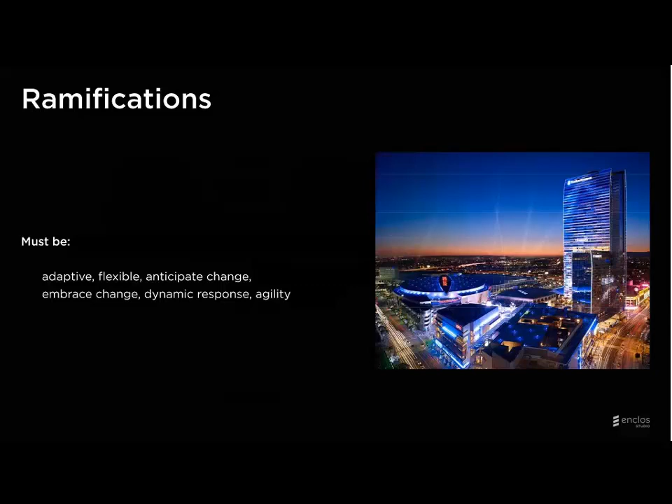And so really, when you have this model that isn't repeating what the systems are from one project to the next, what then does become required is a group of individuals that are adaptive and flexible, and it really becomes about agile minds and a willingness to evolve.

And really, when we talk about the tools that we do that with, we're here to talk about our parametric workflows, but really the backbone of that is not a software. It's really individuals who are willing to think logically, organize their process, map out their process, and then execute, and be willing to work together. And so things like authorship of design have to be shared, and a willingness to sort of pull out the best ideas from your peers.

So the actual tools that we use in our practice early on in the process, early phases, we'll use anything all the way down to Excel to manage data. We'll use other forms of database as well. For our iterative modeling, we don't only do Rhino with Grasshopper, but a lot of times that's what the architectural team is using at the time we get involved. So we try to use the same tools and interface in the same platforms, but bring in the constructability angle, not a design modification, but introduce constraints.

And then during estimating, we use Revit as well. And once we get a project and it becomes secure and real, we end up modeling everything out in greater detail in Revit, and then using Inventor to create each unit of our system automatically. And so we've developed some internal tools we call the e-generator, and it will take this information out of Revit and Inventor and automate the drawing of the part and the unit pieces.

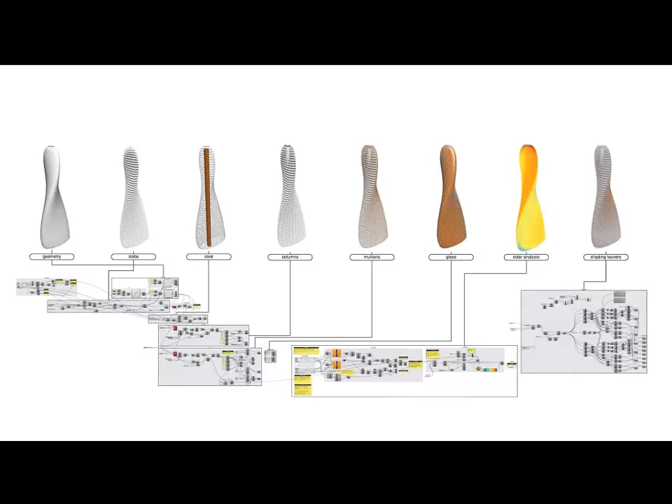And then here, maybe I can stitch together several different processes. So all of these steps are dependent on the initial form that we see at the far left. So if we twist that form twice as much as we see here, all the subsequent steps will update automatically. So by mapping out this logic, we're able to save time in developing iterations.

So the first project has been completed, but is kind of on delay to open up. And this is the Fulton Street Transit Center in New York City. And the part we're focusing on here is the sky reflector net. The project is located at the corner of Fulton Street and Broadway in Lower Manhattan, and sees around 275,000 daily passengers. It's right by Wall Street.

And so the project team was really developed by a collaboration between Grimshaw and Arup, and James Carpenter and his group really worked on the central piece that we're going to talk about.

So this is the initial preliminary renderings. The idea is to deliver daylight deep into the depths of a public space that doesn't otherwise normally get daylight. And the solution really ended up being a complex geometry. It's a doubly curved form. It has 952 unique panels.

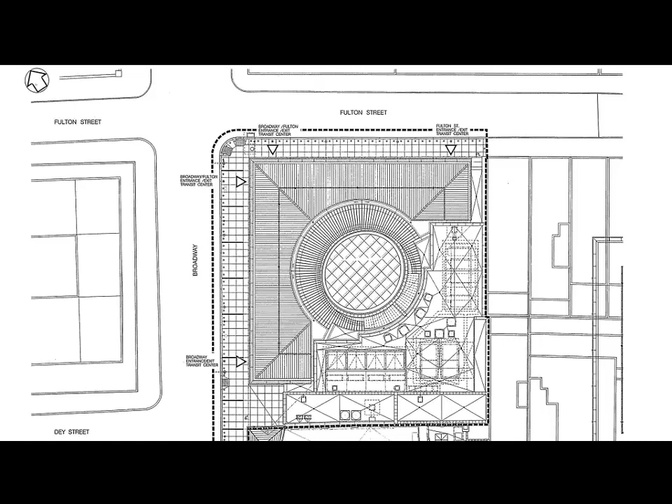And what drives the shape of this are these 1,000 plus nodes. And all this information has to be managed, and it has to respond to the different loads, but it all happens over small square footage, only about 8,500 square feet. And so there's a lot of data points, a lot of lengths, and all these are unique numbers.

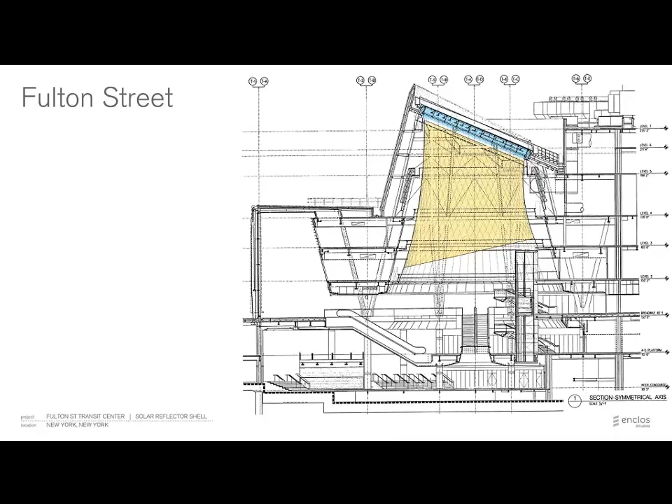So really we saw this as an opportunity to explore parametric tools for the first time in our office about 6 years ago. And this is just sort of peeling back the layers of the structure around it. There's a metal-clad dome that surrounds this doubly curved net that hangs from a skylight at the top. And all this is supported by a series of V-columns and primary structure. So the net hangs from the top, and daylight enters through that oculus at the top.

So this is sort of our interpretation of the initial renderings, and then a couple years ago under construction. So we see that this is a confined space. This exterior metal structure, the metal cladding, really kind of obstructs and limits our ability to construct this shape. So the whole idea was we had to develop not just a way to manage the complex geometry, but to install this efficiently in a market that has very high labor prices.

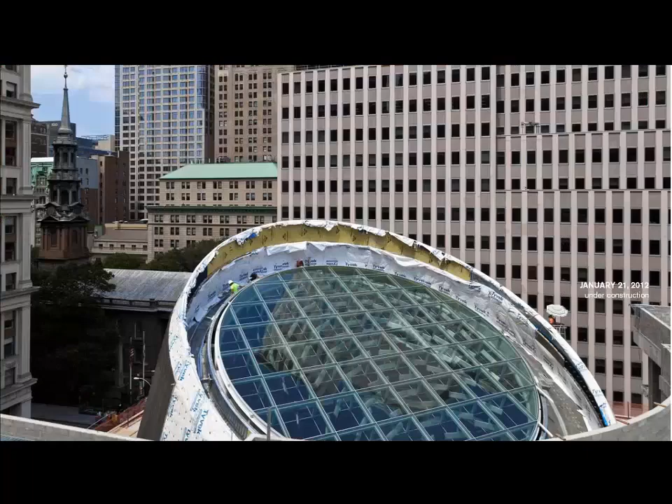So from the beginning, we had a commitment to trying to bring out this cable net in one piece and hang it to minimize the amount of labor on site. And so just to give you a little bit of idea of the layers of the system, light penetrates through the south-facing skylight, reflects off these anodized metal panels, which have a varying degree of perforation from the top to the bottom. So at the top, they're more reflective and have smaller holes. At the bottom, they have larger holes, more transparency.

And all of these connections to these panels were achieved with a single typical node. And so these paddles, what they were termed, are all the same throughout the field, but every condition that they're receiving changes. So the tolerance has to be built into this connection to allow for all the different conditions. And I like to say this is a typical condition on the project, which actually never occurs.

So this is what that system ends up looking like. This is from the mock-up outdoors, so you get a sense of the light coming through. In reality, there's cladding behind it. But really, the mock-up is a great way for us to explore sort of the systems of engineering and how the Grasshopper and the parametric tool and the workflow would assist throughout the rest of the actual project.

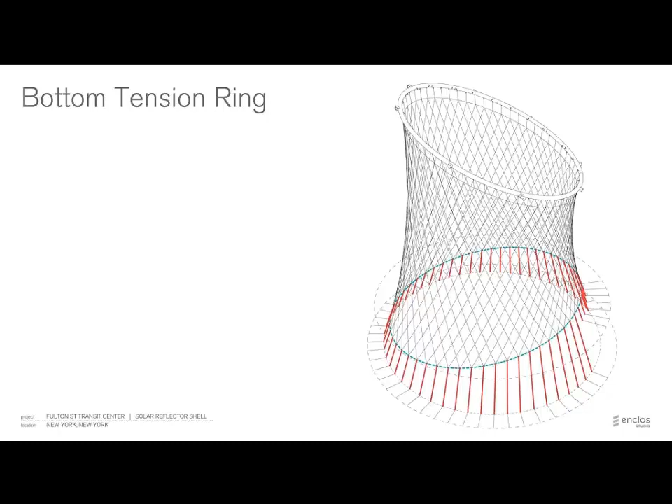So as I mentioned, we wanted to hang the net from the top, and we were just planning to pull and make all of our adjustments down at the bottom level where we had better access. We didn't have to have field crews up the man lift. And so there's a series of 56 rods down at this level, and we were just going to adjust those to a set dimension for each of them that would equate to the total tension that we needed in the net. So at these perimeter conditions, you end up with these really intricate joineries of many paddles come together.

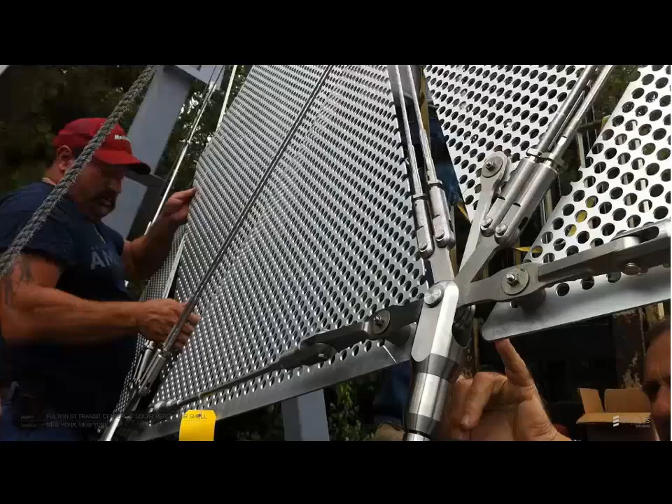And so this relies heavily on the tolerance of our fabricators to deliver these pieces, which is more like pieces out of a sailboat than it is out of what we normally do in architecture, or what we see in other enclosures. So early on, we were doing modeling of that typical paddle connection. This is a 3D prototype, and ultimately working with our vendors to provide real fabricated parts early to assist the decision-making process and gain approval on these pieces.

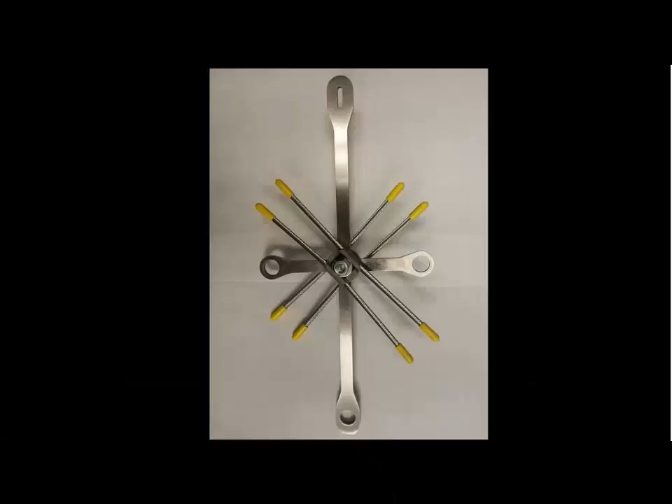So really, the foundation of the project are these 1,056 nodes. And we said we're going to relate every single step of the design, of every drawing, of every fabricated part, back to this information. And the idea is when we get to the field, if these points have to shift around because the steel we're attaching to it is misplaced, which is almost guaranteed to happen, we can automatically update these points and verify that the system will still work or generate new lengths.

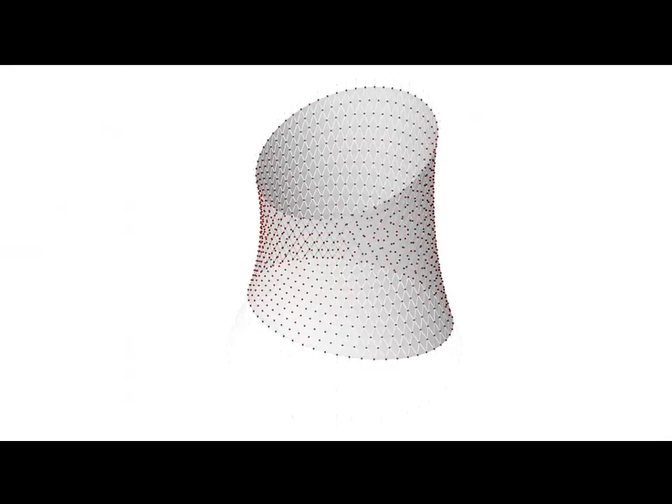So the relationship of all these panels within those nodes is a constant relationship we'll explore. So this is what our Grasshopper routine looks like. It's kind of the obligatory slide to show you the Grasshopper, but really it's a dynamic tool, and it doesn't do much good to look at it in a static form here.

But the reason I really show it is we tried to partition our workflow here. So each of these clusters represents a different row within the geometry. That way, if we were identifying problems in the middle row, we could really quickly access the point in the routine to solve it. Because a lot of stuff is happening behind the scenes here as the computer just receives these points. So the less you can see, the more at risk you are down there.

So the question of input and process really changes when we're receiving the input and we're not in control of the accuracy of that input. So early on, the way we received that input was, it was kind of a high security project. So we received all these 1,056 nodes as an image, not as a PDF, not as an Excel file, not as a model, as literally a 24 by 36 sheet on our table.

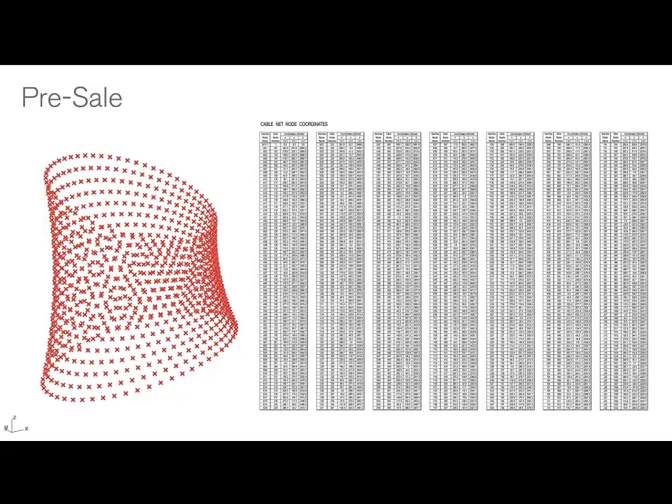So we need to be smarter than just to input these manually. So what we did was we scanned these in, and we did a text recognition, and then we had an intern spend a lot of time filtering through to make sure all the sevens were sevens and not ones. But really, the real potency and potential for this is through model sharing, right? That would have saved us a bunch of time.

So what our process looks like on this is we have these XYZ coordinates rounded to 1 decimal. And we saw the detail of those componentries. And we really need to be at a higher level of precision than that to work at that scale. So what we had to do was use this initial information, put it in, and then reverse engineer the true form and develop a new set of more precise points, because of this holdup in the process that we weren't going to get these data points truly from the engineer.

So once we had these, we were able to do all sorts of things like visualize the geometry and do takeoffs. This is just during the pre-sale phase. These are the kind of things we're producing to get vendor quotes and to work with our sales team. Then we get the project, and we go through this exercise of structurally engineering it. And so the net is tension, and each row is prescribed a different tension. What we see here on the right is the top 3 rows get one set of tensions, the next row gets another, et cetera.

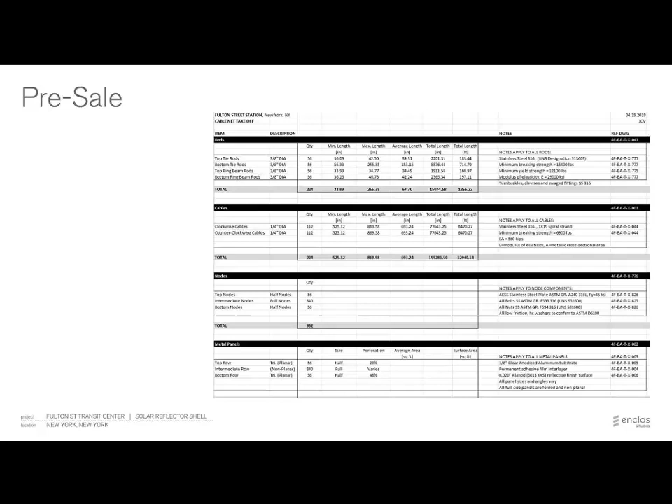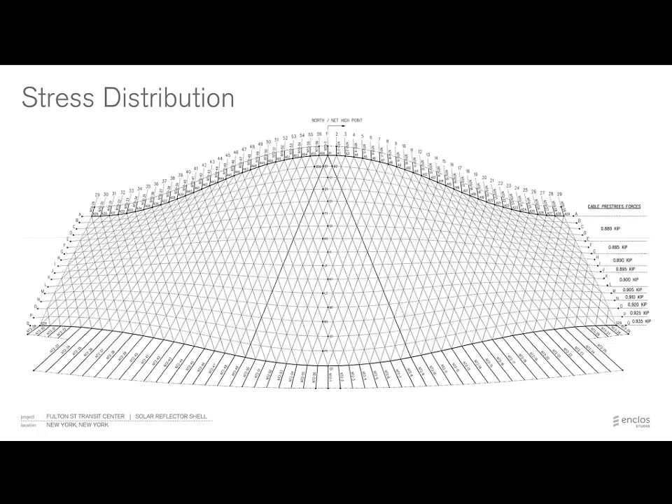But just like the accuracy that we required on the nodes, this even distribution isn't true to what the net's going to find its form to be. So this is our starting point. We use those initial nodes. We use these initial tensions, and then we develop a higher level of information. We generate what the specific tension is on each one of the little cable segments throughout the net. And we have to do this iteratively until we reverse engineer the geometry back within the tolerance that we're going to be held to in the field.

So what we do is we end up using our structural analysis program, Excel and Grasshopper, and we do this loop, and we try to get it to the point where we generate the 56 values at the bottom that we can pull on the bottom rods that will equate to the form that the net really wants to be. So we did this analysis, and fortunately it took about 4 iterations before we could get the displaced values from the desired locations within tolerance. And so after those 4 iterations, we were good in one direction and over 90% were good in the other.

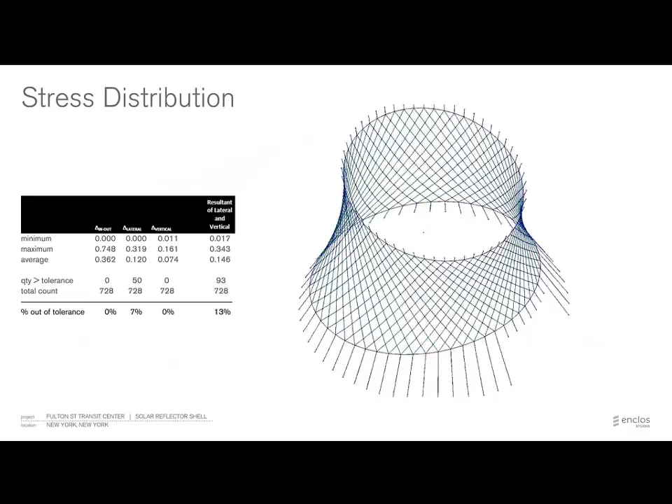So really our process here is with the deflected shape, we end up with these feedback loops. So this is sort of our nomenclature in the studio for thinking about parametric workflows. Within the process, before we wrap up this subroutine, we end up coming back around to the initial step. So after we get the deflected shape, we're bringing a new set of information back in as our initial input until we end up with something that's resolved.

So really, the real value of this tool on this project is in fabrication. And you have 952 unique panels, and I said I don't want to draw 952 panels. I'd rather spend a week drawing or coding or mapping the logic out once and then letting the computer do the work. That's really the value here. And it's me being selfish. The tool just helped me.

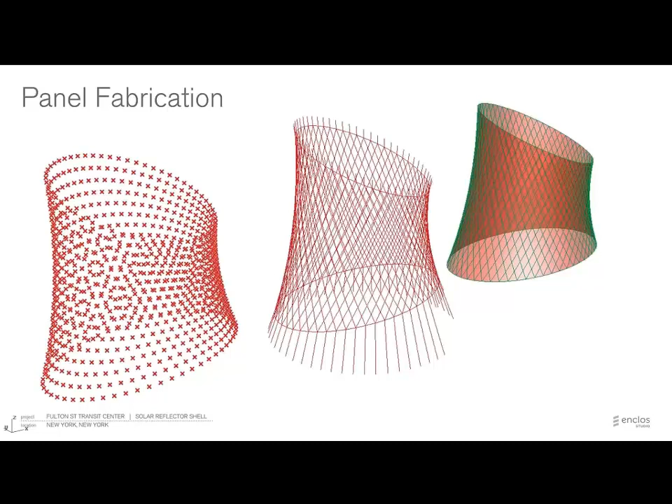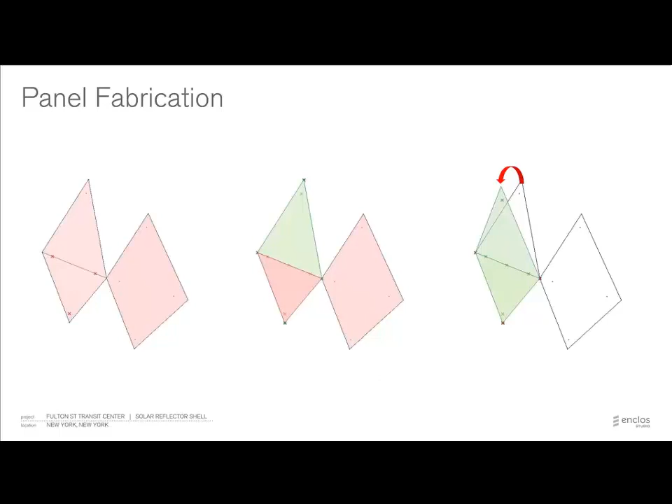But here you see sort of the relationship of the nodes to the panels. Each panel is an offset of the center lines between 4 adjacent nodes. You end up with these rhomboids, and then it is a doubly curved shape, but the panel, being metal, is planar. So it ends up getting folded along the midline. They're fabricated flat and then folded in the field. And so in the model space, really what we need to do is take the panel, unfold it, and then place it flat so we arrive with a series of pattern cuts, what we see on the right.

So this really summarizes our process. We have the Excel data that is our input into our Grasshopper routine. We have each one of these clusters as a row, spitting out all of our panel drawings. And the level of information that we're producing is not that complicated, but it's happening really quickly. And what we get is dimensions that we can then coordinate with our panel fabricator.

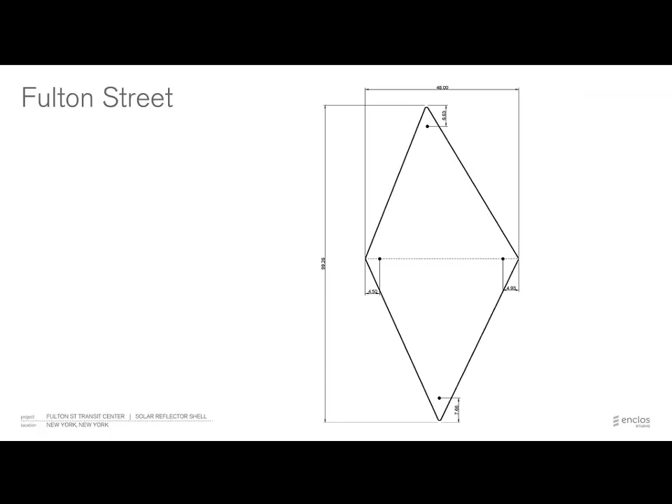Now, truth be told, the real value of this was to automate the panel generation. Because of working with a vendor who, just because of legal issues, we weren't able to just give them our stuff. They went through their whole process of coming up with their own panel geometries and their panel set information. But what this did end up doing was allow us to do quality assurance. We would just do side-by-side checks like that. So there's still opportunity to take this further, closer to file-to-fabrication.

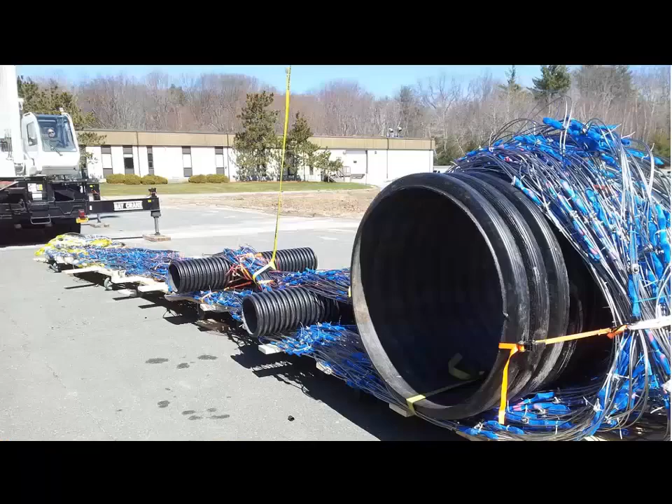So then, mock-up and prototypes, that's really what we live by. And really the challenge here was not engineering, not creating all these 952 unique panels. It was, how are we going to build this thing? And so this is the cable net, what it looks like when it arrives on site. This is up in the shop in Massachusetts at Tri-Pyramid, who developed all the cable componentry. And so what we did was, before we showed it to the architectural team, we did a practice lift in an outdoor environment that had no enclosure around it. So if we couldn't figure it out here, we didn't stand a chance in the field with the metal enclosure around us.

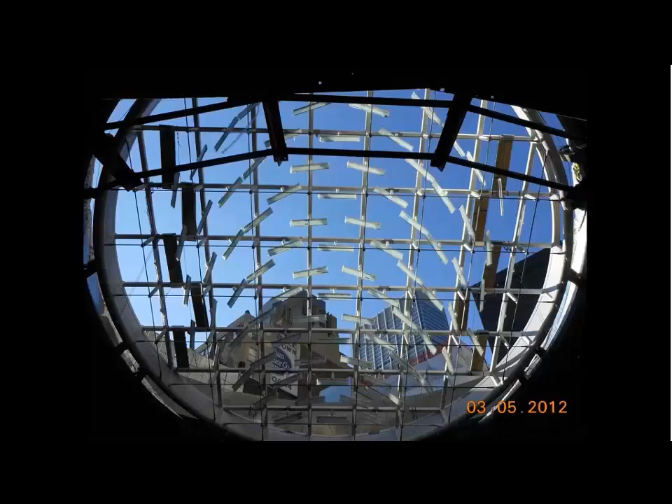So really, the way this comes to life is the field superintendent, who's responsible for building the job, develops this temporary rigging ring that the cable net comes in, it's attached to this cable ring, and then there's these lifts that lift it up, and then it gets transferred from this temporary ring to the final ring on site. So it all works good, then we bring the architect and the consultant, we show it to them, the owner, they have buy-in, and then you get to the site and you pray it works as smoothly as it did out there.

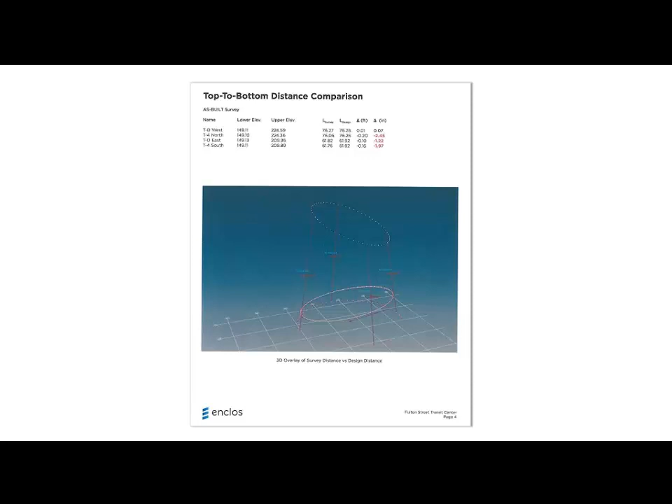But before we get to do that, the parametric model was very helpful in assisting in survey processes. The rings at the top and our interfaces are almost always off. They're off by some level. The tolerance of primary steel compared to the tolerance of these stainless steel fittings are very different. So what we decided to do was we're going to fabricate everything within the net and just hold the initial geometry to be true. And then we get out to the field and we make adjustments only at the bottom rods. So we were limiting the amount of adjustability that was dependent on the field measurements to these 56 rods at the bottom. So we waited to fabricate those at the end.

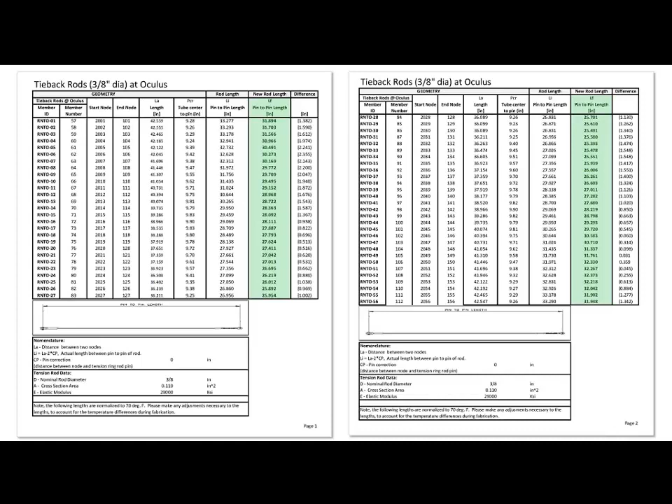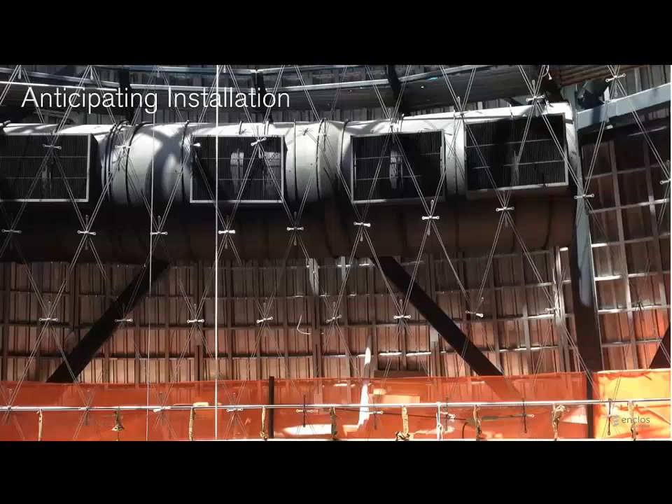So one thing where the parametric tool and 3D modeling and clash detection, it doesn't always work out perfectly. And these are some of the honest tales. This is the HVAC duct that we see here behind the net. We had some pretty detailed Navisworks models that were coordinated. There's some concerns on site that maybe this HVAC duct is going to interfere with the net.

And when they did the clash detection in the model, everything was good, but our project manager didn't trust the model. He trusted his eyes. And when we went into the model and we really simplified it and looked at it in 2D, it was really just a modeling error. The diffusers on the face of the HVAC weren't modeled to the level of detail that they actually are. And so here we can clearly see, just in a simple two-dimensional drawing, a problem that the 3D model missed.

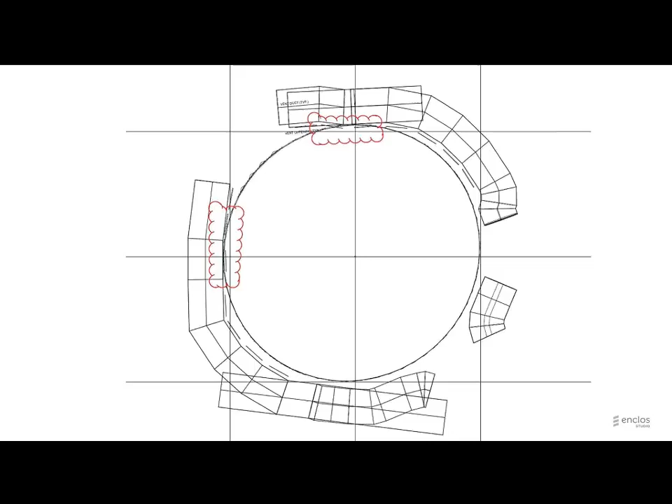So when you're collaborating and you're blending models, you really need the level of modeling and accuracy to be consistent across the parties. Another error in the field: all the components were supposed to come out tight, and some of them got jostled during delivery and they were loose, so we had to send crew members along the top to tighten every single one of the rods at the top.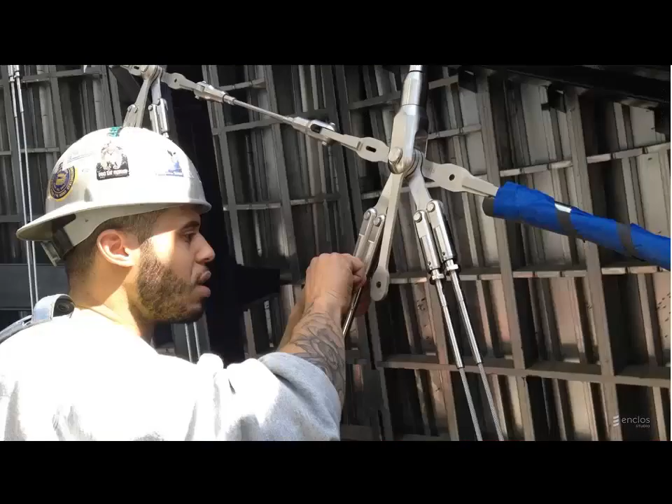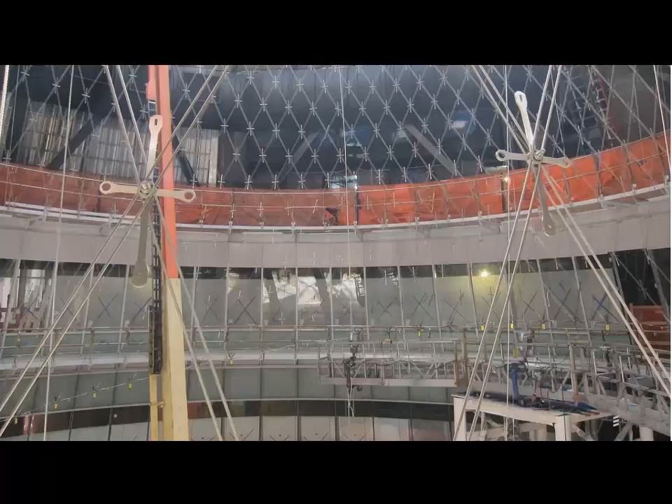And at that point, you're having them readjust something that you have to 3 decimal places. They don't care about 3 decimal places. They know an eighth, they know a 16th, they know a quarter. So really, the precision of how it gets done in the field is the accuracy of this gentleman's thumb or his eye. We could generate complex data all day long, but really simplifying it and delivering it to the field teams is more important.

So then the net gets hung, it gets tension, it's in place, and we start cladding. And really, we know the net's going to be off, but we have tolerances that we're going to be held to. So really, the whole story visually on how you're going to believe if the geometry is correct is the gaps between the panels and that these gaps look consistent and maintain consistency across multiple panels. So we ended up spot checking about 10% of the panels to prove to the architectural team that the net was in the right place relative to itself.

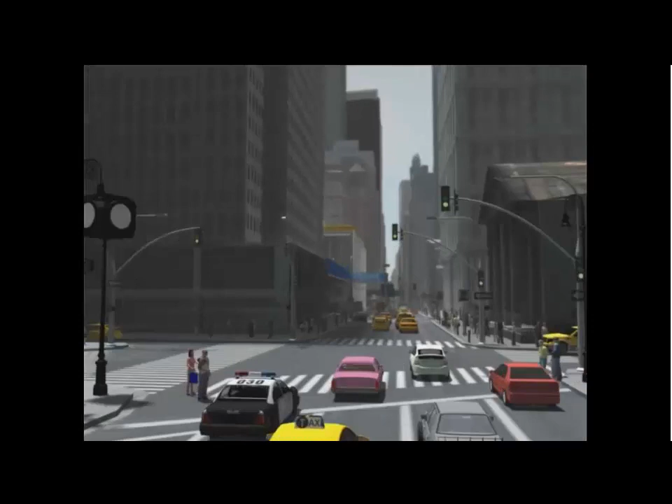So the real power of having some of these models and working with the individuals who are going to build this structure is trying to convey a system that they're not used to installing, an installation strategy that they haven't done before, and maybe studying some of the on-site constraints that you can't really get when you're practicing in the parking lot at the shop in Massachusetts.

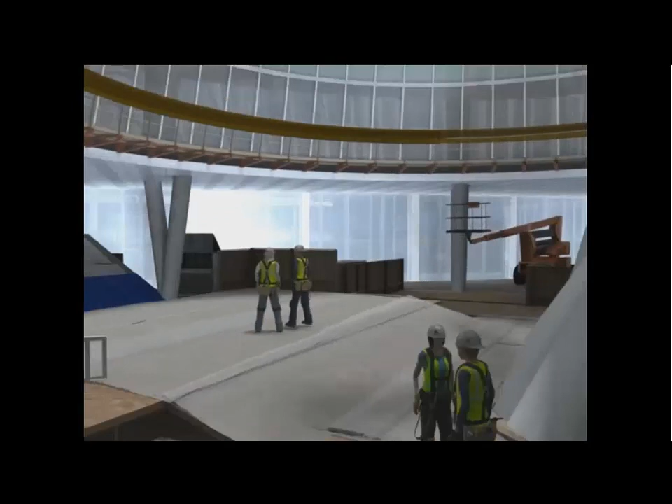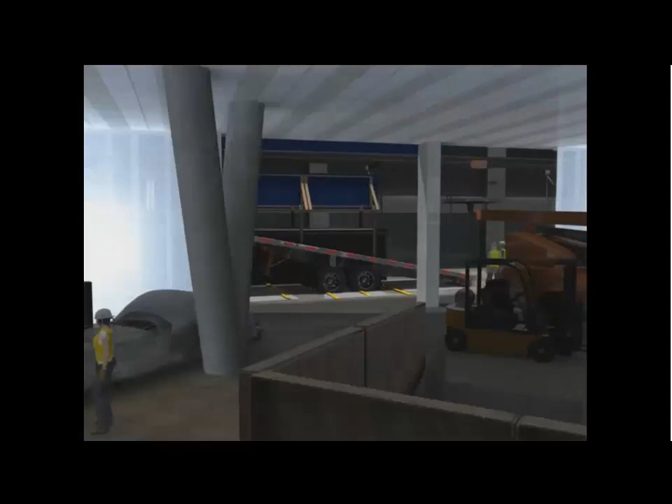So on-site, there's an elevator core that really limited the ability to get the net hung in one piece. So it really required almost an orchestrated rotation that we'll see here in a second. But this is how we sold this story to the ownership to give us clearance for a whole day to have the space just for us, not for other trades, and that we were going to get this done. So we animated it. We used these models.

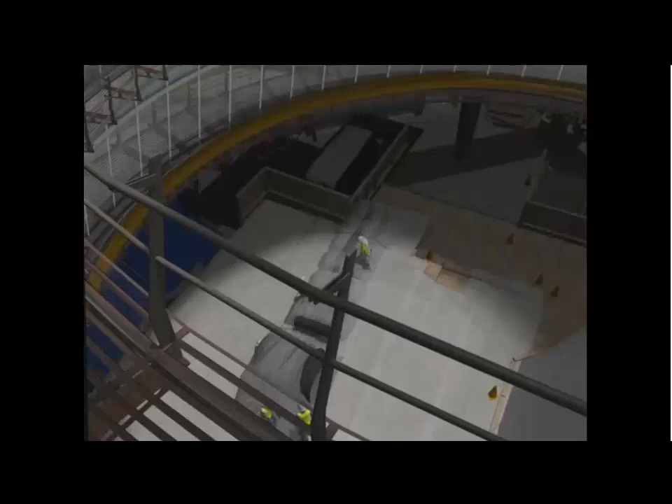The model lives throughout the life of the project, and it actually tells a story and educates on safety and installation methods. So here we're taking the parametric tool, and we're using it in a true constructability-driven way. And so this breaks down the configuration here. The net came in as one piece. It gets assembled here, this temporary ring, and then they start to peel the net, unravel it, and attach one ring at a time. And so this is great when you have a project completed and you have the imagery from it to see how the tale up front ended up being the reality in the end.

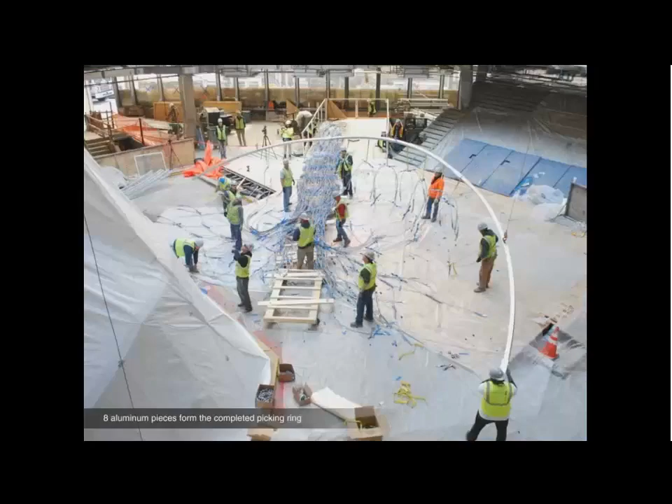So the net arrived on site around 7:30 in the morning, and the net was hung by 11:30 a.m. And so yes, we had maybe a crew of 4 times the number of people we normally have on site, but it was just for that morning, and then we had freedom to install the panels as we pleased.

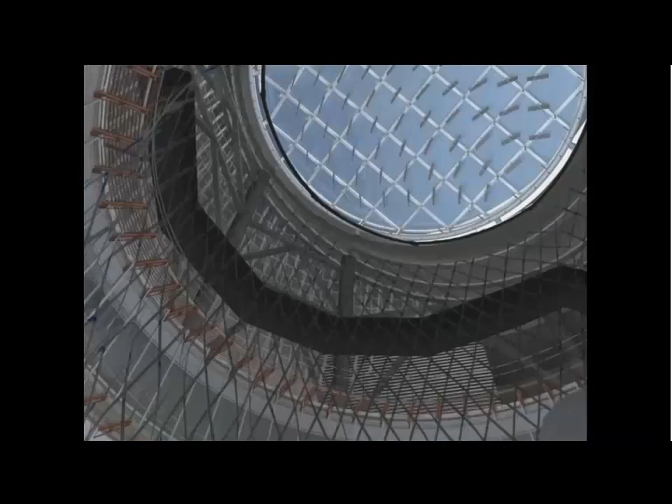So for some of the computer modelers out there, animation was done in Maya. So we took our Grasshopper models, we baked them into Rhino, and we brought that into Maya to animate the sequence. And this goes back to the studio: the individual who helps to do these animations has an industrial design background.

He would have otherwise gone to the automotive or video game industry, and he's been part of our team for 5 years, and he's part of our workflow where we have a modeler and designer collaborating, and then he's helping to tell the story. And it really comes down to that field superintendent working with this visualization specialist very early on to build this whole narrative.

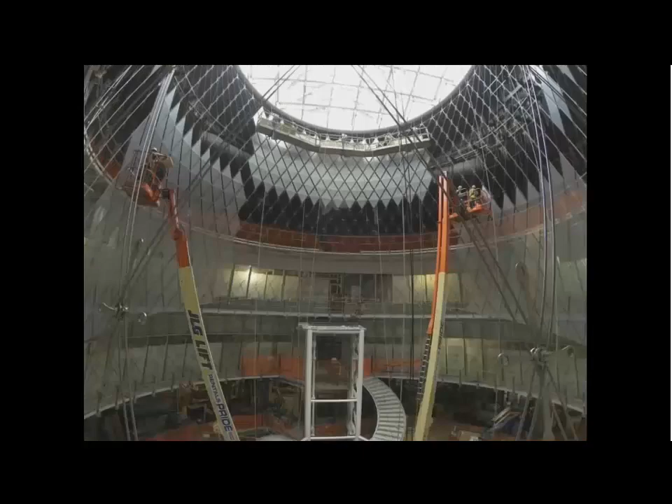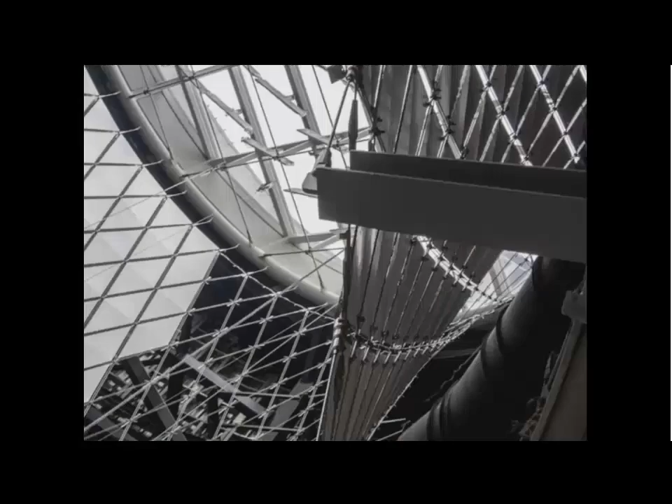So the project was supposed to open up at the end of July. It's been delayed at least 3 months, so that would put us at the end of September. The net's been done for about 1.5 years itself. So if you get a chance and when it's open, I encourage you to visit it.

And so for our process, we weren't really in control of our input. We ended up using parametric workflow from estimating to structural analysis through fabrication and mock-up. And the sort of recipe of tools we had were Grasshopper, Rhino, SpaceGass, which is our structural analysis tool we used here, and Excel. And then we gave it life through the installation. So this is the initial vision, the vision of how it would get constructed, the reality of how it got constructed, and then the final product.

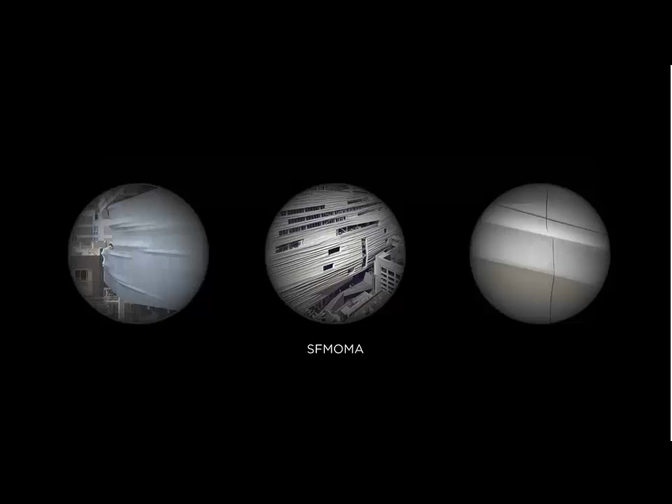The next project I'm going to talk about is the San Francisco Museum of Modern Art. This is a project designed by Snohetta, and we got involved in this about 6 months before we got the project, and we were way over budget, but we were in a better position than our competitors. And what we had to do was go through a 6-month exercise back and forth, meetings in New York, meetings in San Francisco, to really pull out 40% of our price for the envelope that you see here.

And this is the initial architectural vision. And the architect really had a desire to use a material called fiber-reinforced polymer, because this gave a lot of flexibility to CNCing the shape of these panels on this ripple wall that we see here. Now, in addition to that, the architect wanted to use the fiber-reinforced polymer in the flat surfaces as well. So this was kind of a contradiction to what the material strengths truly were.

The project is an expansion to an already existing museum. It's a very, very tight site. And the initial concepts that were developed by the architectural team and the facade enclosure team really required a lot of field installation, on-site installation. What we see on the left is sort of a stud wall with panels placed on top of them, so we have multiple passes in the field. We have the construction of the performance barrier itself, and then another installation for the horizontal banding panels.

And then on the right, the other idea was, what if we made large precast panels about 32 feet wide by anywhere from 12 feet to 24 feet tall, without really any consideration of where the crane may be set or how we would ensure performance of that backup barrier.

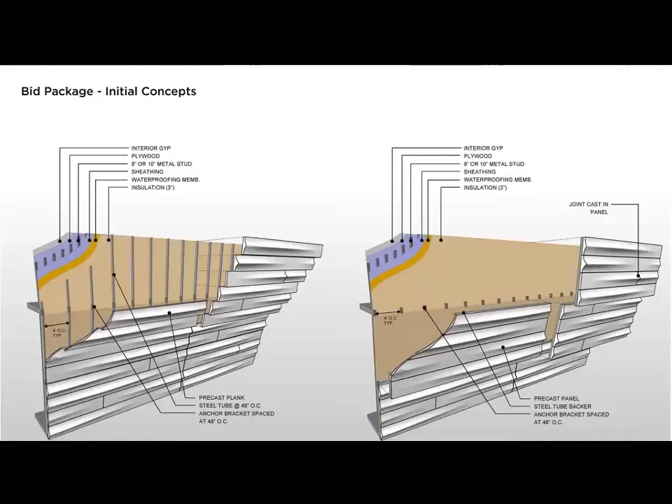So where we started was we went to the architects and we listened to them, and they said that they wanted this fiber reinforced material. And we said, we want to unitize the backup system. We don't want to do this field construction. So we kind of had our priorities on the table from the very beginning. So we went back, spent some time coming up with a system that used opaque backup performance units, similar to our current wall systems, just without glass, stuffed with insulation, and then we'd come back and take the fiber reinforced polymer panels in a second pass on the exterior.

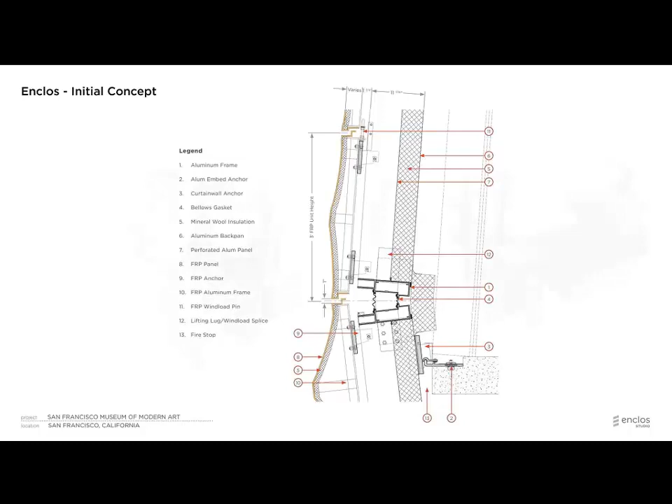Now this still didn't solve the problem of having multiple passes in the field. And because of the geometry, we end up with these interfaces between units that aren't typical towards a flat construction. So we end up with some jogs and some angles between our transitions. We end up going with a couple bellow gaskets here at our stack joint to kind of remedy some of the performance issues along that key seam. So these are the kind of visuals we generate early on to help communicate the system of the units coming together, how we attach to the floor.

And then we end up coming up with a strategy that would get us within budget. They give us a job, but the ramifications are we end up with some revisions to the apertures within the geometry. And on the flat walls, actually the cost of fiber reinforced polymer in a flat application was more expensive than in a curved application, because the flat application required stiffeners as backup, where the curvature in the other solution gave it some inherent strength. So we ended up in one meeting saving a big chunk of money by saying, let's get rid of the flat fiber reinforced polymer and let's do a white glass instead.

And so this required the architectural team to be flexible, to understand the budgetary constraints of the project and the inherent strengths of each material. So the FRP is limited primarily to this east facade and then some small portions on the west facade.

So here, there's a lot going on in this geometry that is continually changing throughout the 6-month design assist process. So what we tried to do is deliver a clear plan early on how we would work through the architectural priorities as well as ours. So the first part was performance, this backup barrier that's going to protect the museum, everything that's inside of it.

So we said, let's forget about that contoured, rippled surface for the moment, and let's set our interior surface based on interior programming requirements and go from there. And so really what this started out with was setting our stack joint location and offsetting those from our edge of slabs.

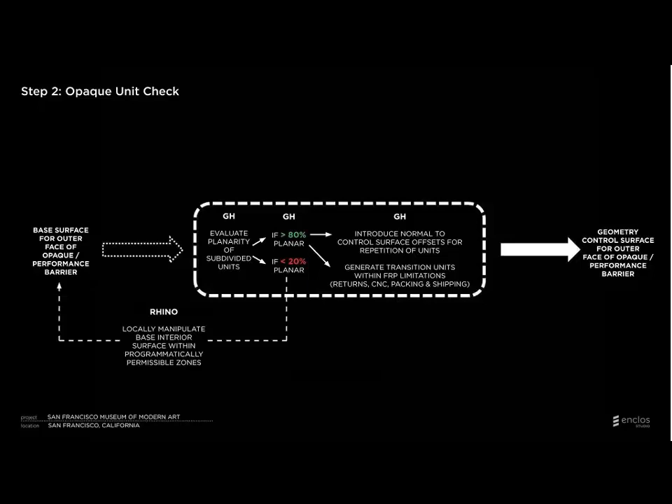And what we see in red are units that end up being warped or heavily warped or requiring some sort of transition or fold in them, something that couldn't be fabricated flat. So what we wanted to do was take this backup system, these unit geometries, and we just threw out a number. We said 80% of them need to be flat, and that'll equate to this price. And so we probably started at 20% of them being flat and 80% being warped, and we had to reverse the model here. So the way we did that was we studied subdividing it differently.

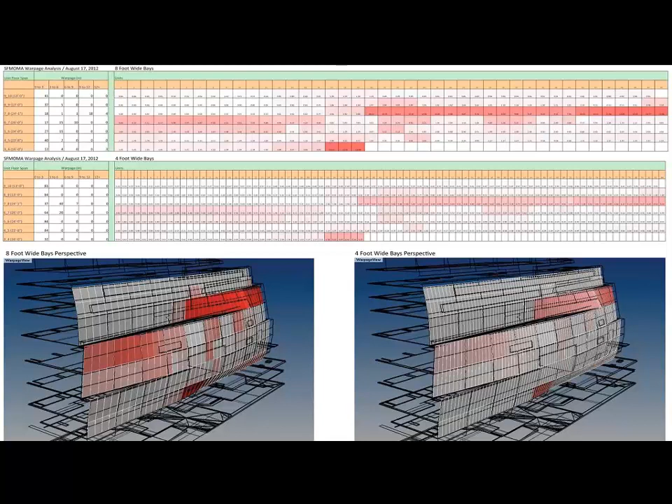On the left, we see 8-foot wide subdivisions. On the right, we see 4-foot wide subdivisions. With the 4-foot wide, we could limit the warpage to something that we could actually do in the field. What the project ended up at was around 5.25 feet wide units. But really, we're starting to see some key zones in red there that became the focus of our back and forth exercises. So really, to get over the hurdle and get to our goal of under 20% warped units, we had to take a different approach.

We had to say, we can't have some warp throughout the entire field. What we said is we need zones of planarity, and then we need transition zones. And we'll introduce transition zones as often as we need. So these red bands end up being our transition zones. And we said, instead of taking this performance barrier and warping it in the field, we'd rather articulate this fold in the shop and ensure that our seals are of high quality. So this ended up being how we achieved that with these folded zones.

So here, we ended up setting that backup performance layer surface. So that worked with everything they had going on inside, all their slab edges, all their programmatic space, all their circulation zones. Now it was just a matter of working outwards from there to generate the rippled surface.

So the way we went about that was we created a zone of overlap between the FRP and the backup system, and then worked with Kreysler and Associates, our vendor who fabricated the FRP, to generate how far out could Snøhetta take this rippled surface. How much space did you need to offset it to provide a zone for backup support structure? And then how contoured could those ripples be? And so they set those limitations.

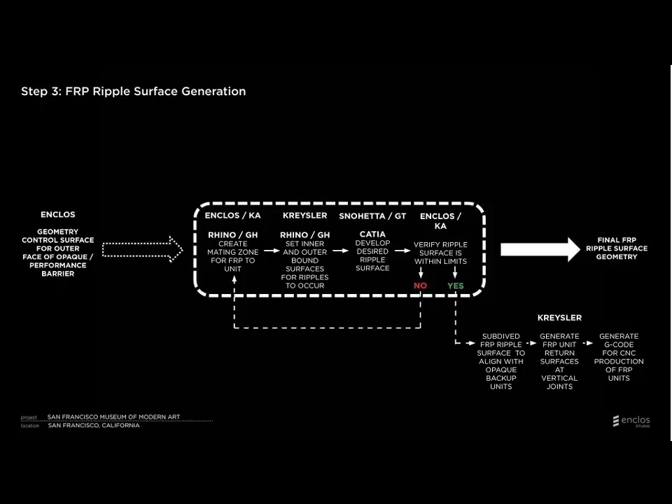Once it was acceptable, then Kreysler got the green light to go ahead and start CNCing out each of these units, generating the returns that allowed it to attach, etc. So to start this process, we needed to understand where the desired geometry was for the ripple surface and how much offset they were really looking for.

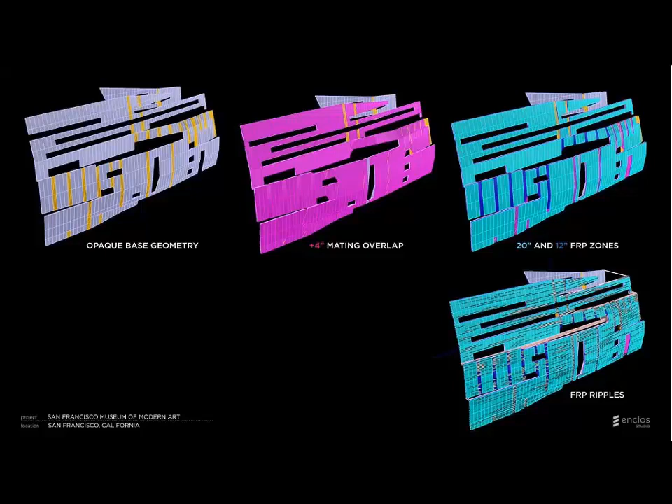So we see the development in the top left of the base geometry, the overlap systems in purple, then the 20-inch FRP zones, and in the transition units themselves, we pulled them back to 12-inch because we had to consider the space required to do that transition. And then in the bottom right, we see the overlay of the desired ripple surface occurring within these zones. So then we end up with this master surface. And then we get the go-ahead to subdivide these vertically, and this allows the fabrication to initiate.

So the way we end up dealing and tracking progress throughout this design assist doesn't really work naturally with some architectural teams with a classic Gantt schedule. So what we did was we developed a system of mapping priorities and decision making that we just call priority workflows. And what we see here is on the far left the highest priority issues, and on the far right the deliverables that we're going to be held to.

So what we said is we really need to set these slab edges, we need to set the stack joints, do all these really regimented, boring constraints before you can do all the exciting stuff with the ripple surface. And if we make progress there, then this is how we're going to meet our deadlines. And so this tool is one that we created on the fly for this project.

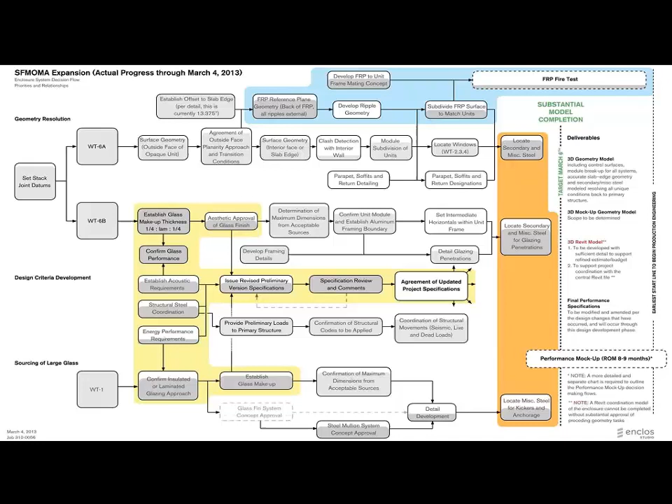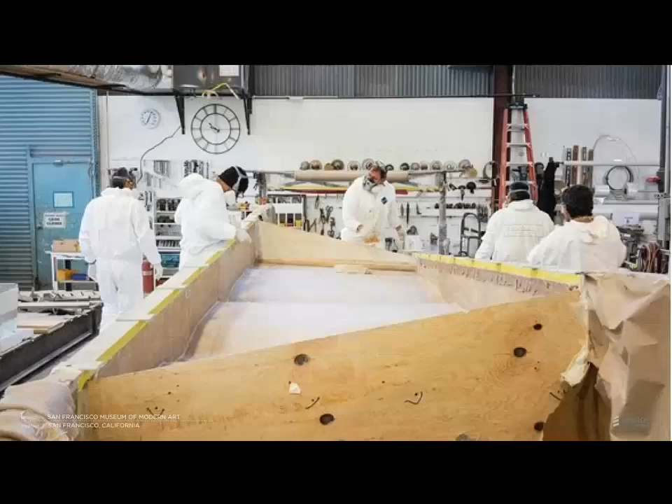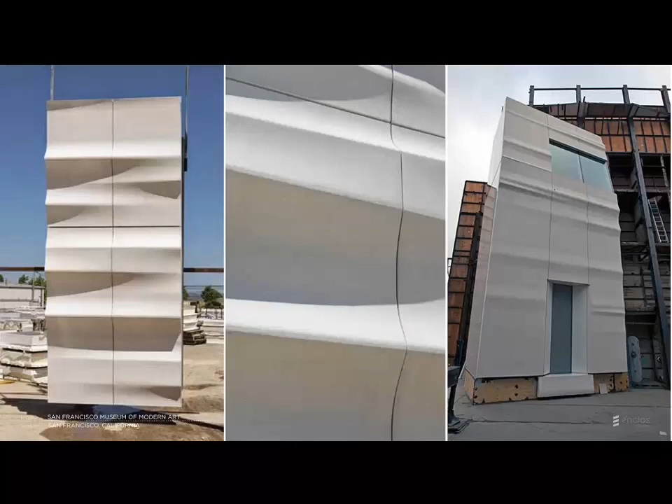So the FRP panels themselves, they're CNC milled out of polystyrene, a negative of the shape. These units are about 5'3" wide by a maximum of 24 feet tall. This is an example of a mold for a warp transition unit. And then this is a unit just outside the shop in Napa Valley. This is the series of mock-ups we did. On the far left, a visual mock-up, and on the far right, performance mock-up.

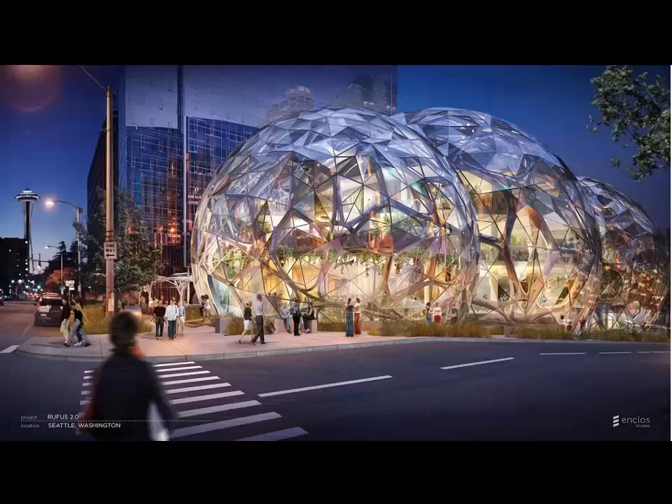And so when we found a lite that was not acceptable, we would take it and we would rotate it 360 degrees and use a routine that would try to force it into the limitation box. And we would either find that it does fit or it does not. And then once it does fit within the limitations of what's fabricatable, it would produce the various options that would make that work.

So here we have routines that we can use from project to project to really work with the architect early on to say that revised geometry is within limitations, is within the constraints of vendors. Each vendor has different constraints, so if we can set that parameter in the routine, we can do these checks very rapidly.

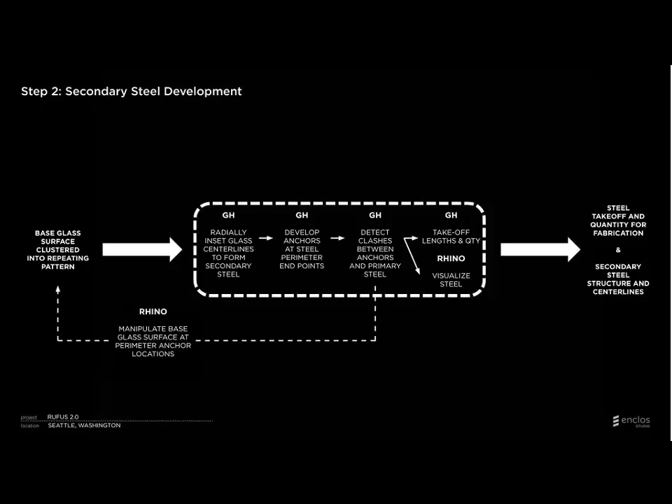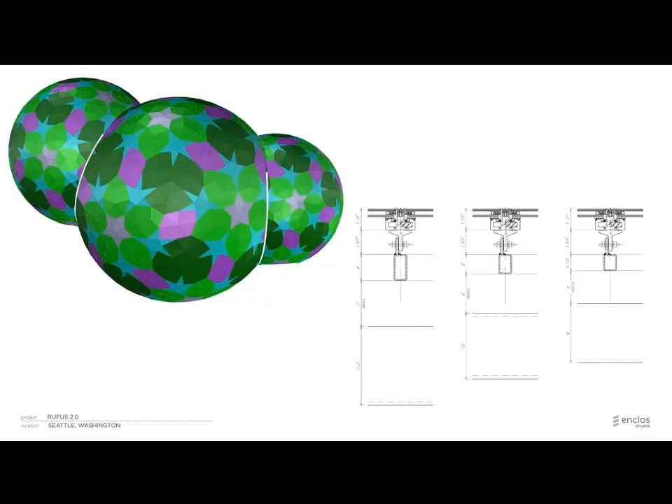So then once we have the glass subdivision where it needs to be, it becomes a matter of offsetting the structure to generate the secondary frame for the glass to be supported. And each sphere is scaled proportionally, so the primary structure on the larger sphere is larger than the medium as well as the small, and so is our secondary frame.

So what started to become complex is always the atypical conditions, the interfaces with other trades. So here in this case, it was the anchor conditions between spheres. So we used our Grasshopper model to set up a logic of what those rules were at these anchor conditions, and then we let the routine carry itself out to model all those various conditions. So here on the right, we see the interface of that anchor at the primary structure.

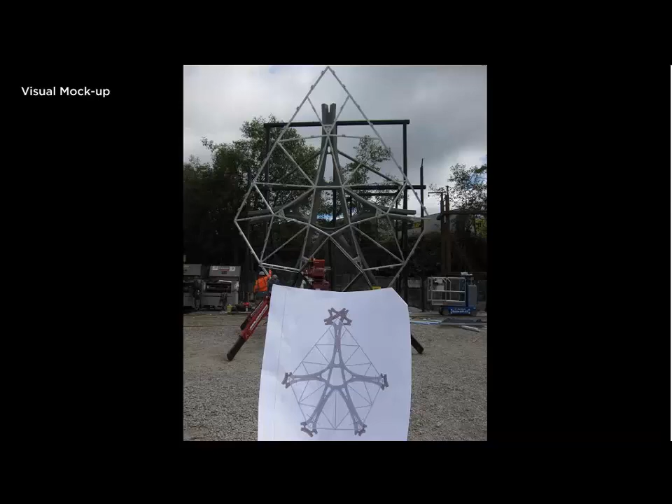So just last week, these are some shots from our visual mock-up. We see the primary structure in gray behind the white steel frame. And so these are some of our views of our mock-up drawings. And then this is what it looks like. The steel contractor on this has his work cut out with all that bending. But it's really impressive steel.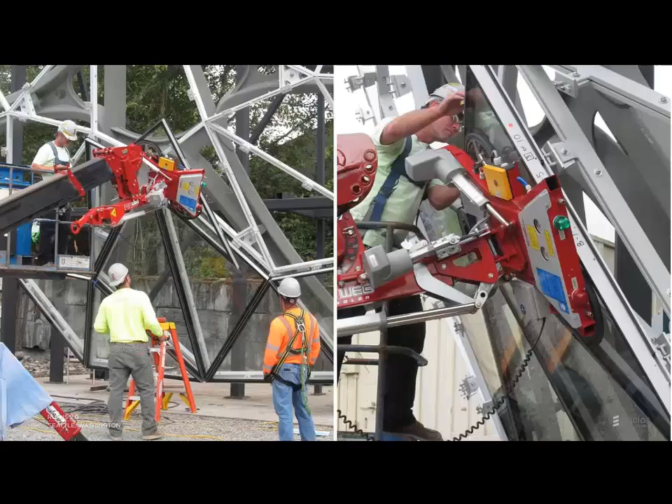So here we see the installation of the glass lights. And then this is not sealed. It'll be field sealed this week, but this is the visual mock-up that we'll show to the owner and get approval on. So this is about 35 feet tall, about 25 feet wide, so pretty large.

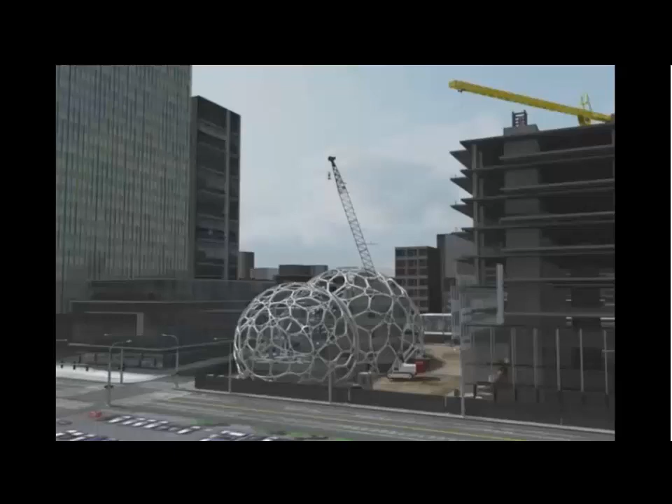And so once again, we have a story that we're trying to sell on how we're going to construct this. And we're using these same models that we use to do these studies to generate this storyboard. And here, really trying to articulate the concerns about interfacing our anchors with the primary steel. We're concerned about access to the underside of the sphere, having limited access, so we'll need to use different equipment to install the lights on the underside of the belly of the sphere versus the lights on the top. And that's what we're trying to convey through these visuals.

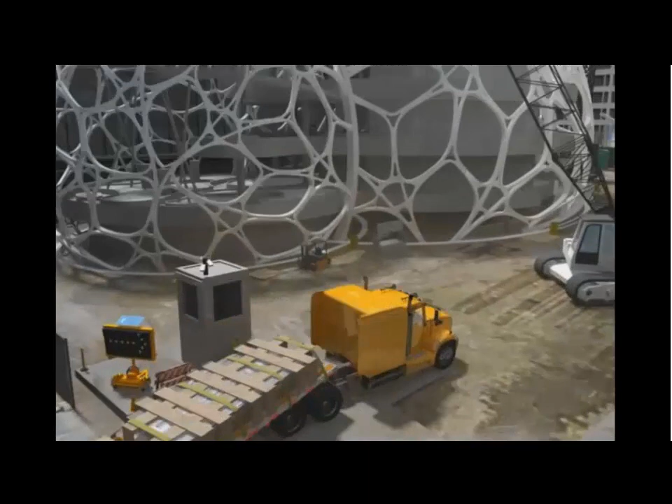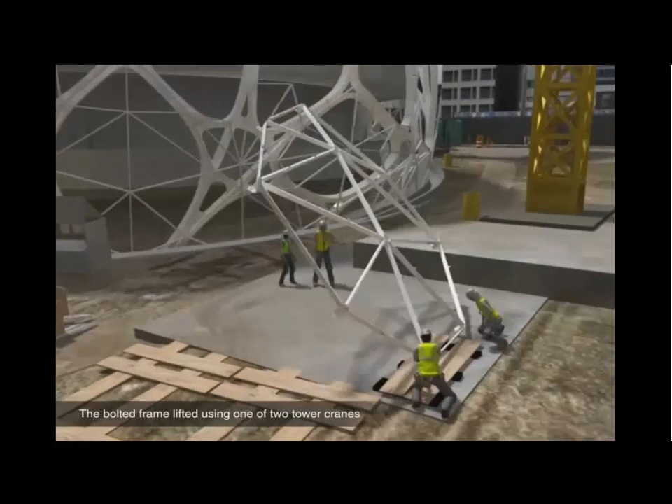So the contracts that we end up working with on these projects is we end up going through all these efforts, these visual mock-ups, and really the architect and the owner still have the ability to pull the cord and go with another facade provider in the end.

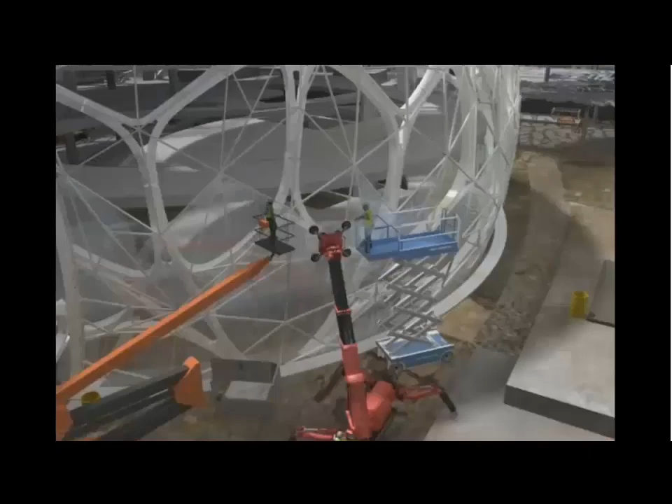And so we really need to tell a unique story that is advantageous to us, that we can construct better, that we've thought out more detailed, so that we can price it more detailed, and really be responsible with how we're selling our construction scheme and the price for that. And so, we'll go through 6 months, 10 months, 12 months of these efforts, and we have to work in a way to make sure we can perform the job in the end.

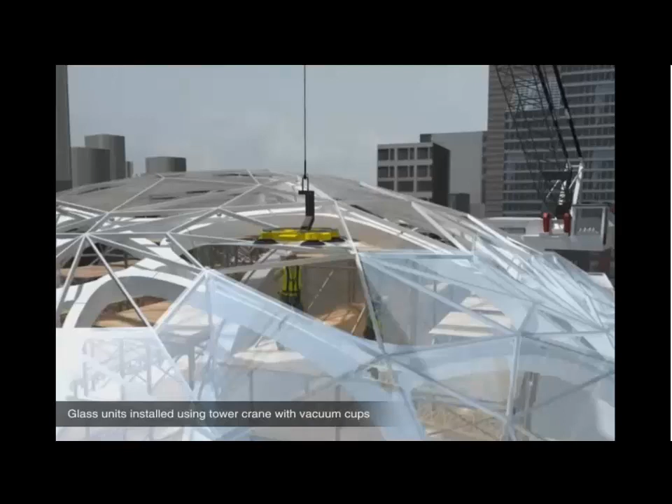So I won't narrate too much on what's going on here, but the whole idea here is to use tools that are familiar to the architectural team to communicate these ideas. Be willing to receive model information in a number of different platforms from an office such as yours, and then introduce limitations and constraints that affect how it gets built or making it a real thing.

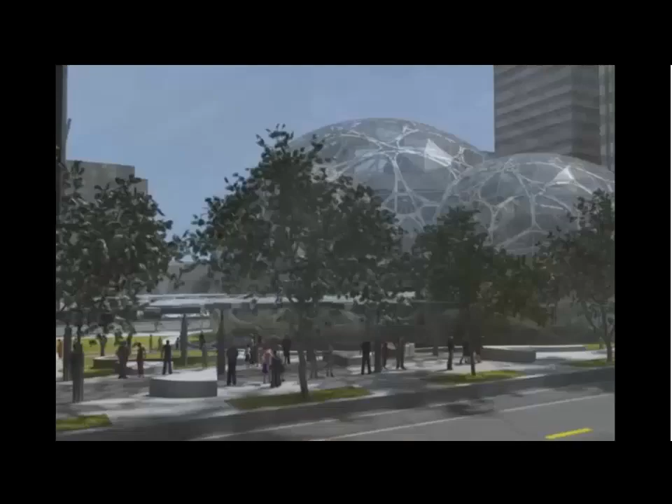So when we talk about model sharing and items like that, or sharing Grasshopper routines, it's really in the spirit of delivering that next step of constructability and feasibility. And it's not about modifying design. The initial concept versus where it is now look very, very similar, but the amount of detailed study and exercises are very intricate and are required to make a job real.

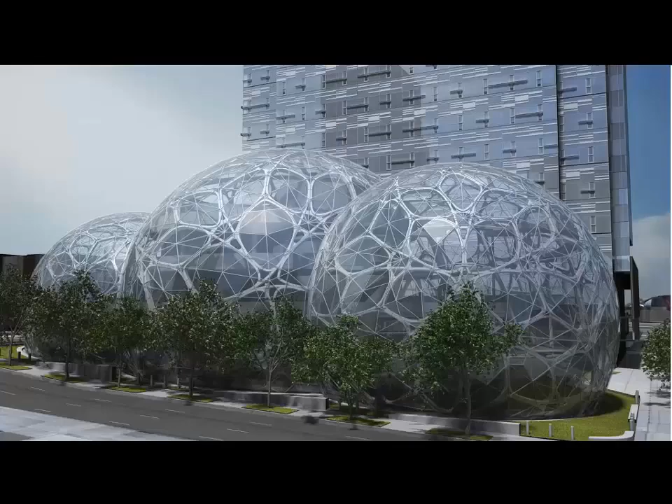So for the sake of time, I'm just going to go through this project quickly so we have time for questions. This is the Academy Museum of Motion Pictures in Los Angeles. This is a project we spent the first 6 months of this year working with Renzo Piano's group on trying to develop an enclosure scheme. And we'll focus on this dome on the left.

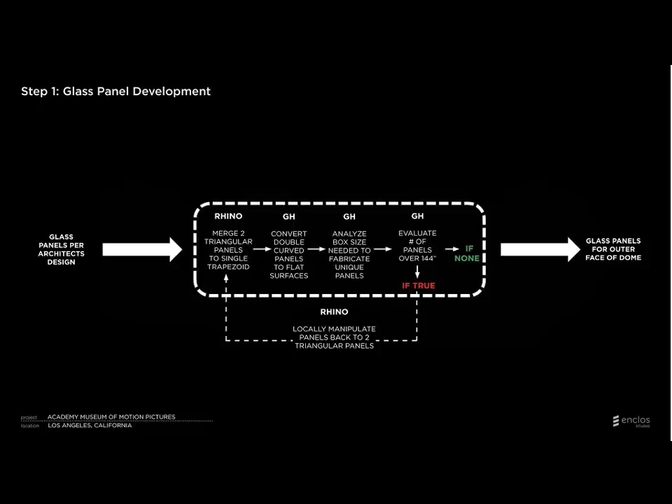They do phenomenal work. But another challenge was we couldn't really support a triangular glass light because triangular glass lights, in the way that they were being supported here by points, would end up having really high stress concentrations in the corners. So we wrote a Grasshopper routine that would take a triangular light and try to make it one with any of the adjacent trapezoids by it. So we would end up with a pentagon in the end, and then it would study if it fit within the dimensional constraints.

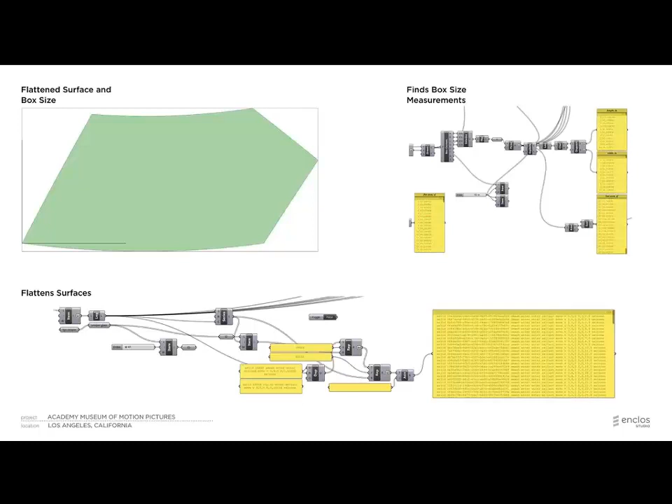So when the geometry is changing every couple of days, having these routines where we can check, set up, really saves a lot of time and gives that feedback loop to the project team quickly. So this is the development of the structure. Won't go too much in depth here. And once we set this, there's a cable grid underneath, and we model all these logics to populate the form, the model space on their own using Grasshopper.

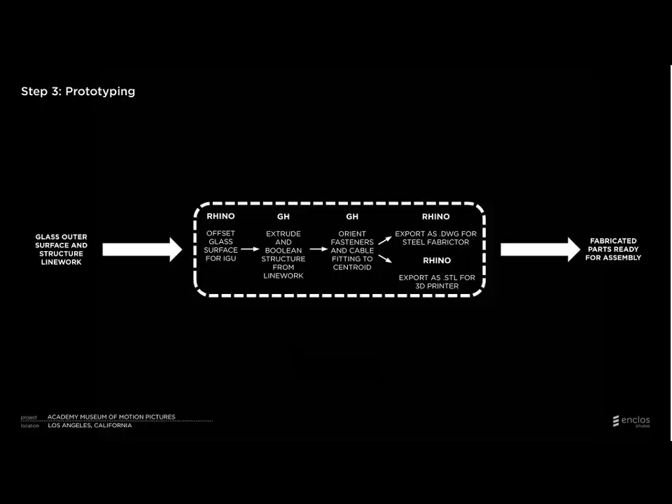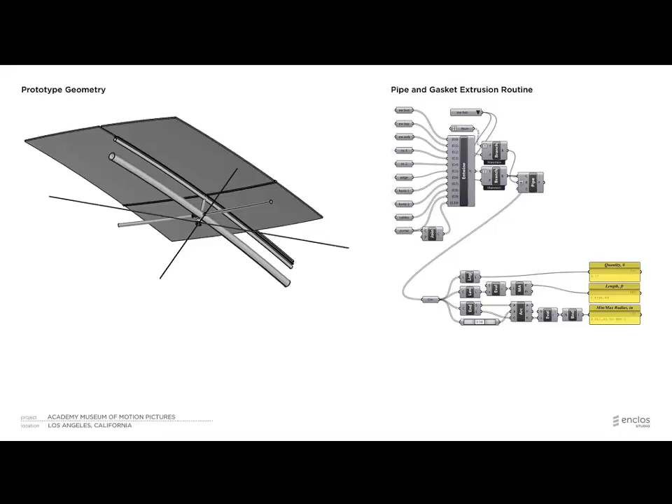And so where this project ended, they had some budgetary issues. They're going back to some redesign, but our 6-month phase culminated with a development of system designing, turnover of 50% DD, 100% DD kind of drawings, as well as a series of prototypes. And this really gets back to our philosophy about prototyping to assist decision making, because the prototypes we developed here, almost the second you put them on the table, in some fashion, they become obsolete immediately. There's some flaw that doesn't read in the model space, but only reads in physical form.

So we worked with our vendors to create prototypes like this to study how the horizontal member comes into the primary member. What's that weld look like? What can our vendor deliver on the quality of that weld? So just in a piece like this, we end up pulling together anywhere between 6 and 12 vendors.

You have a different vendor for the steel, a different vendor for the cables, the cast stainless steel items on the bottom, the painter, in this case, instead of glass, the plexiglass. So these are sort of quick turnarounds.

So just to wrap up, a couple of the key takeaways is that for parametric workflows and in a collaborative environment to work, there really has to be a commitment towards design collaboration. This means being willing to model share, thinking logically, working with constraints, embracing the constraints, and then really studying the right materials for the geometry or for the project or for the budget.

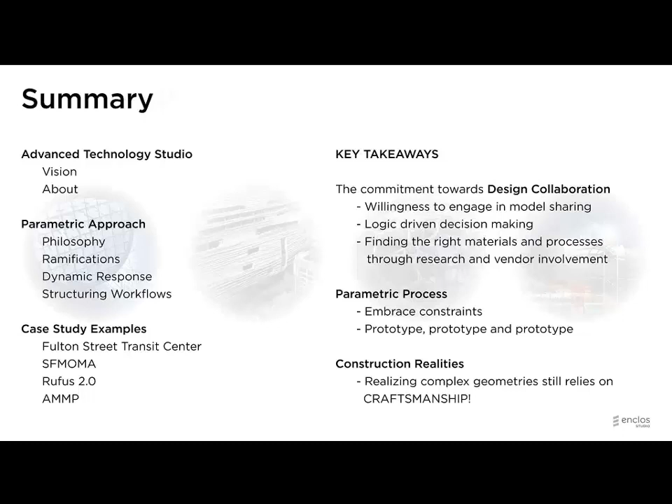Thank you. Any questions? And I was just going to say that people that are in other offices, just please go ahead and speak up if you have a question. We had some questions back here. Maybe we can pass the mic back.

Your presentation with the importance of prototyping, which clearly is an iterative and costly component of the design. And you mentioned when you started that you enter the process at different junctures based on where the architect and owner are at. In the examples that you showed, were you engaged in the process similarly in each one?

And the question I'm really wondering about is, to what degree do you all take a business risk in some of your complex parametric development in order to embed yourselves in the process and become the fabricator and installer? And/or do you also work in conventional consultant type relationships where you're brought on as part of the team and have a consulting fee in order to work on this level of development and prototyping?